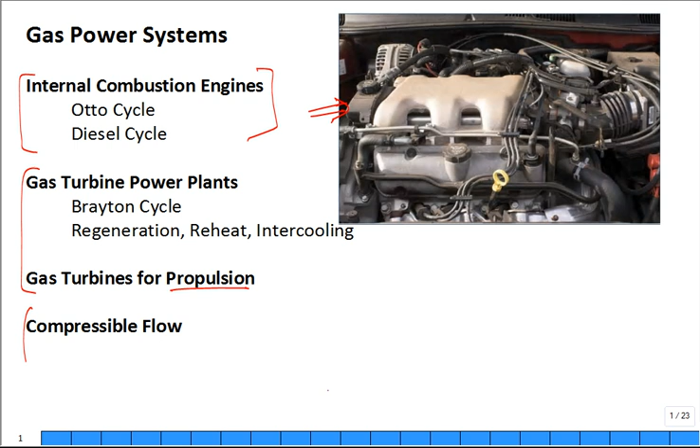How many people have been into engines? Yeah, and they're even getting more complicated because of the sensors and electronics, and you can't hardly do anything now without a code reader.

You should get familiar with the major parts of engines. Let's say this looks like a V engine. It has a spark plug, spark plug, spark plug. It looks like 3 spark plugs on this side, or maybe there's 4, I'm trying to count them. So it may be a V6 engine.

Or you may own a V8, or you may own an inline 4. Some people even probably have a 3-cylinder engine. The newer, really small, high efficiency cars are 3-cylinder engines.

So how many people know how many cylinders are in the engine that they own and drive primarily? Okay, so what is it, a 4? 6? Anybody have more than 8? I doubt it. Anybody have fewer than 4? How many people have a motorcycle? How many in the motorcycle? 2? 2? Who has a motorcycle?

So I encourage you to pop the hood, learn, point at things, understand them, as well as maybe take it apart. But if you pull one of these engines, which some people I'm sure have pulled out of cars, it takes equipment, an engine hoist, and it's very dangerous. You could lose a finger if the thing drops, slips, falls, whatever.

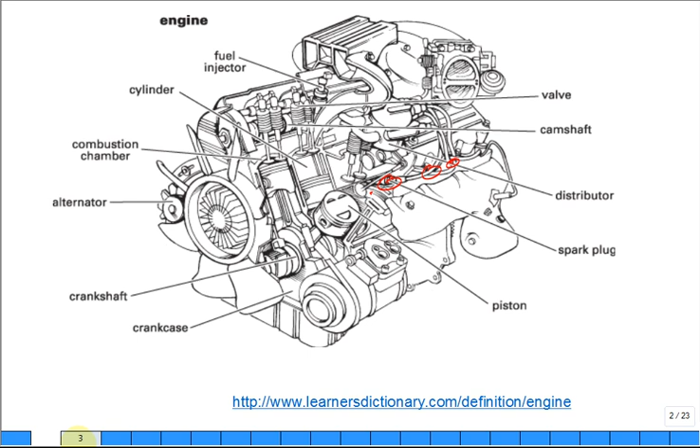Very heavy. But you can also take apart a lawnmower, and you can learn a lot about a lawnmower. It's very simple, but it has all the basic components, right? And what happens that ends the life of a lot of lawnmowers, they have a tree stump or a rock or a boulder, and the blade twirling around in a circle, right? Going like this, with a 12-year-old, 10-year-old, brand new, being trained to cut the lawn, but the dad forgot or somebody forgot to tell him, oh, watch out for that tree stump.

And many a new lawnmower's done. So what'll happen, this will get bent, the crankshaft will get bent, then it's pretty much toast. You can replace it, but it's a pain.

So the crankshaft, from the top up here, is a flywheel. Connected right in here is a connecting rod to a piston. A lot of times the pistons slide forwards and backwards this way. And in the front there'll be a little wire going down to the spark plug. So the piston's going back and forth horizontally, and it's creating the rotary motion of the crankshaft, and that drives the blade connected to that crankshaft.

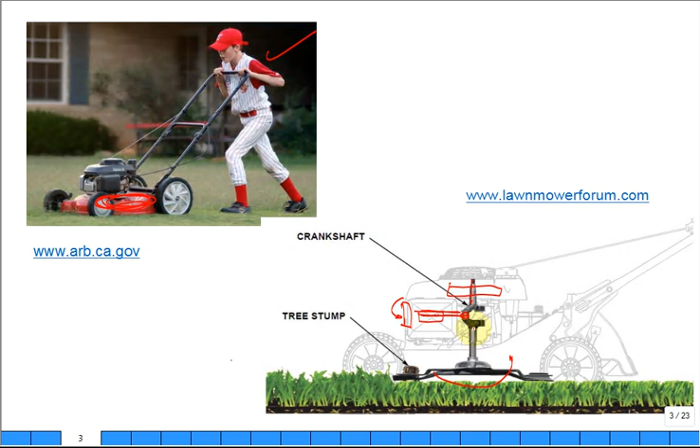Okay, you can find them cheap. Find them when people bust them and then throw them away. Find them old, you can find them on trash piles. So in our neighborhood, down the street once a year, spring or fall, they'd have a big item pickup. It's a great time to learn. Free education waiting for you.

Just go out and get that lawnmower off of your neighbor's trash pile quickly. Why? Because the metal recycle guys are running the neighborhood in circles like vultures, and it's money for them, and they will pull all the metal off because they can recycle it. And there's a lot of aluminum, especially in lawnmowers. So you have to beat them.

And then when you're done taking it apart and learning, put it right out to the curb. It won't last an hour, and it'll be gone. And the person that puts it in the back of their pickup truck will thank you because it's all broken down and easy, okay? So this is one of these where you could take it apart and don't even try to put it back together. So just look for big item pickup, but you have to be quick.

Okay, you'll probably need this, you may have to break something. A big hammer, be careful. And an electric impact will really help, unless it's relatively new, then you can just get them off. Otherwise, you can get a friend and do it together, because it's hard to take those things apart.

You can diagnose and see, oh, that's why they're getting rid of this here lawnmower. See, they hit something so bad it bent that blade. A lot of times when you take it off, this is the top of that crankshaft right here.

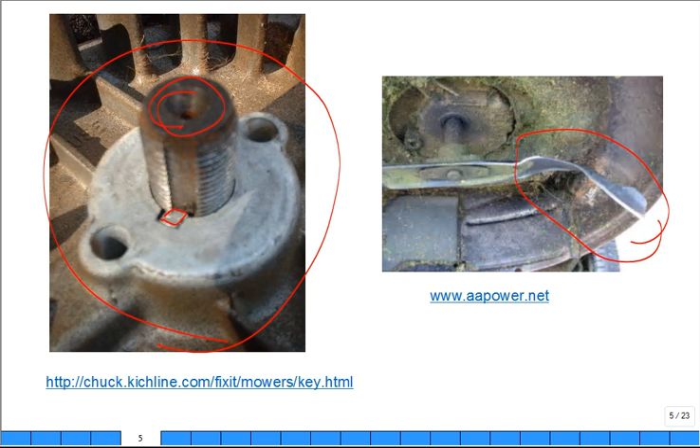So you could learn a whole bunch about fixing lawnmowers and repairing them and how they work. But what I wanted to do is show you some stuff, because out on the internet it's incredible what's available for visualization. Years ago you couldn't watch this - I never had a video. I was through my education and everything, PhD, before the internet was invented.

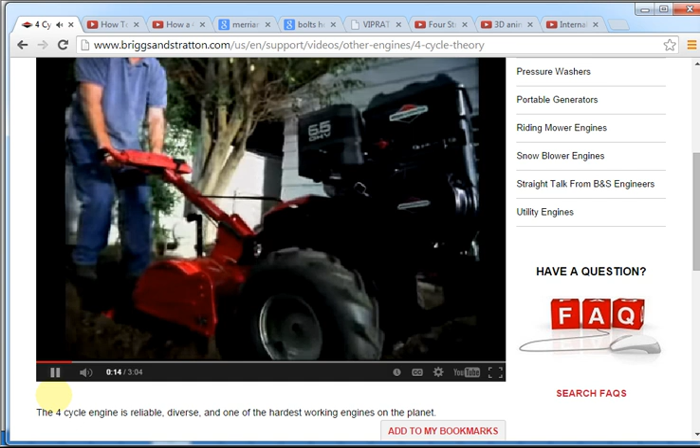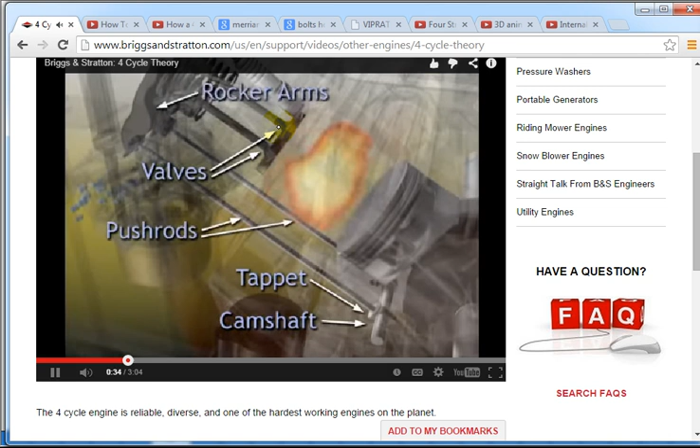Hard to imagine, right? But you can watch this, put out by Briggs & Stratton about engines and the utility and where they go. There's plenty of them. One of the things it does later on is describe the basics of what's happening - maybe I should have let it run without my playing with it - talking about air valves opening and closing. Typically on a lawnmower it's running horizontal, right?

That piston sliding back and forth horizontal, and the rocker arms - sometimes they have them with a little push rod right here. Whoops, I just messed that up, didn't I? I can't draw on that. Here's 4 essential elements: air, fuel, compression, and spark.

A lot of times it's like, check those. Do you have good airflow? Do you have fuel? If you don't have fuel, you can pull all you want, it's not going to run, right? A lot of times the carburetor is all balled up and gummed up after sitting for a long winter season, and you just drop the bowl, clean it, and put it back together, and it works.

So they're going through the intake stroke, ingesting air-fuel mixture. The piston's going down, and then at the bottom dead center, the intake valve will not be open anymore, but it will transition to be closed. Up here is a mechanism with this push rod, little rocker, and down below is a camshaft controlling the valves.

Then you go through the compression stroke. At the top you get a spark plug - did you see they showed a little spark coming up to the spark plug? Kaboom. You have combustion. It's spanking hot, high pressure, high temperature, and it's the pressure that pushes the piston down. As it's pushing, it's expanding. That's your one stroke where you get work out, or energy into the system, into the power.

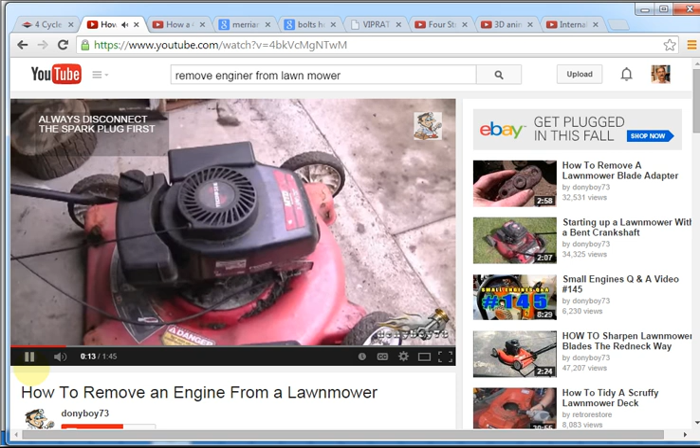Also, if you do get something off the trash pile, there's videos that just show you how to remove the engine. So I just thought I'd quickly show the engine sitting here - that piston, that's a spark plug, and the piston's running back and forth here. All right, he's saying disconnect some cables, and he's going to pull this engine off.

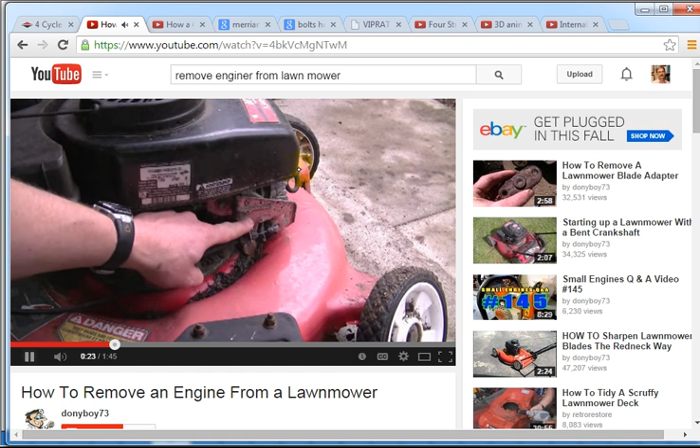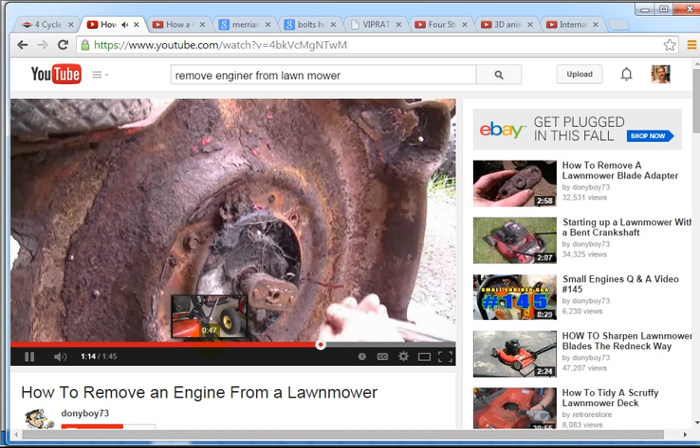All right, he has air impact—much better, taking old bolts off. And there comes the blade. Typically there's 3 bolts, or sometimes 4, those are metal steel bolts that go into aluminum. A lot of times you just shear them; they won't come off if it's old. This guy got them off, and then it just drops.

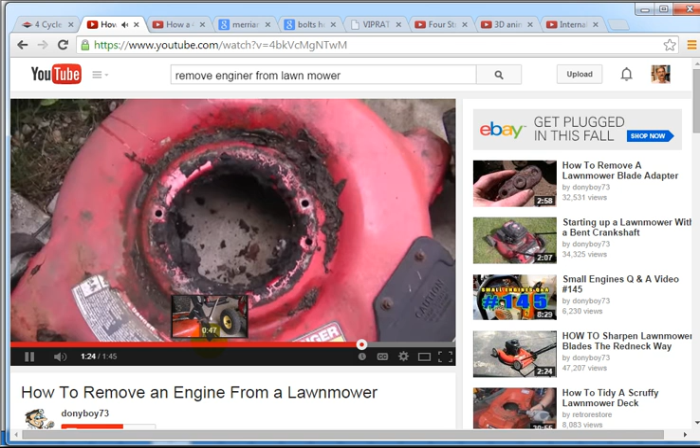So there you go, not much to it. You can get the lawnmower information about lawnmower engines and stuff off the internet. Let me show you this.

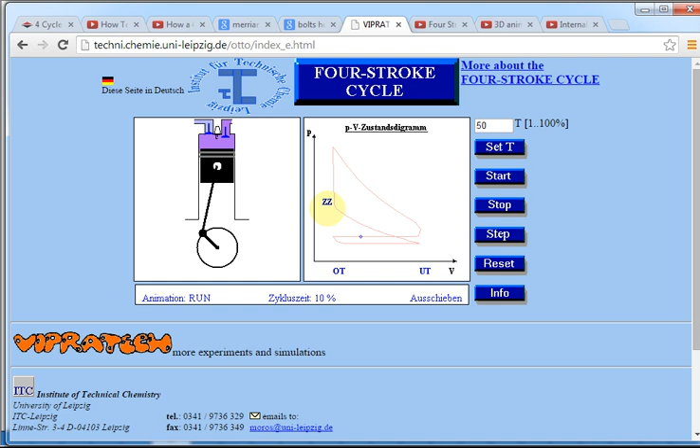Okay? I'm kind of getting out of whack here, but then it gets to bottom dead center, and it starts the compression stroke. And when it gets to ZZ, spark. What happens? Very prompt combustion. So the pressure skyrockets when it's at top dead center. Then you expand in the power stroke. See the big pressure drop right in this vicinity when it's at bottom dead center? That's due to blowdown. And then you still push, so slightly over atmospheric pressure as you're pushing it out.

And you have to push it through the exhaust valve, through the exhaust manifold, through the catalytic converter, through the muffler, through the tailpipe. Finally, atmospheric pressure. And then it drops. So this is a great illustration. Okay. Let's take a look at another illustration. Stop. Some of these are just great. So this is an inline 4.

Now if you can get one cylinder and one piston understood, then you just have 4 of them. And they have it color-coded so you can see the power is the orange when you have a power stroke, the combustion at the top and then pushing down for the power stroke on each of them. You have the crankshaft and how that rotates, translating that reciprocating motion of the piston in the cylinder to rotational motion in the crankshaft. These are connecting rods connected to the piston that slides, and they just show you how that mechanism works.

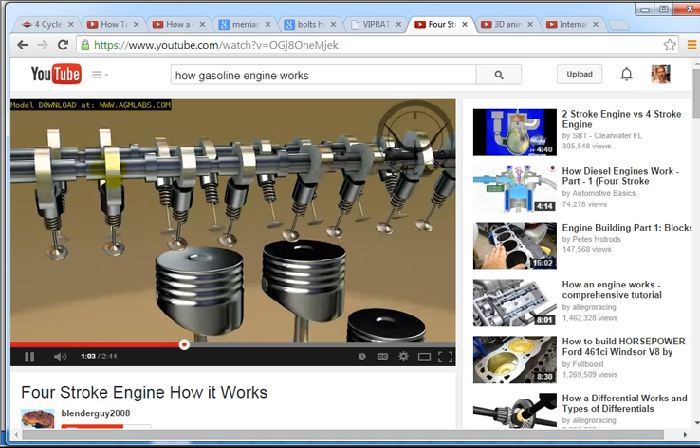Then they have a belt, the timing belt, that goes up and runs 2 overhead cams. So you'll see that overhead cam, 2 overhead cams. And you'll have for each piston 2 exhaust valves and 2 intake valves plus 1 spark plug. I think some have 3 and 2. Anybody know what they have in their engine? They'll be like, oh, I have a 24 valve engine, right? Well, how many cylinders do you have? And so if you had a 6 cylinder, you had 24 valves, 4 valves per cylinder, 2 intake, 2 exhaust.

This really clarifies, I think, if you could see it and see how it moves, and you could speed it up and slow it down. So they've done a great job on these illustrations. I'll show you just another one. Come here. This is a traditional, like Chevrolet big V8. V, why V? The 4 cylinders and another 4-cylinder bank in a V shape.

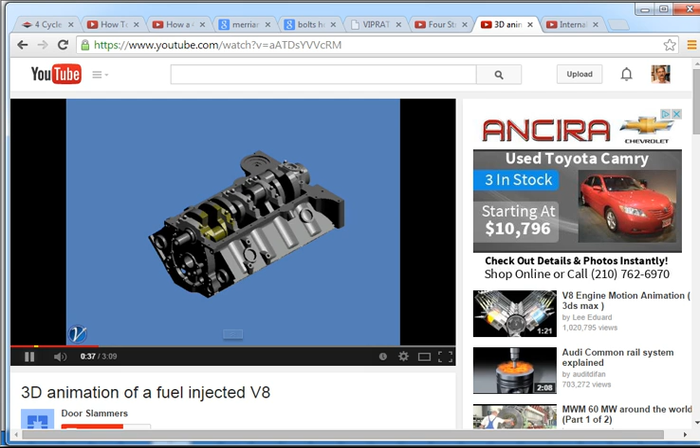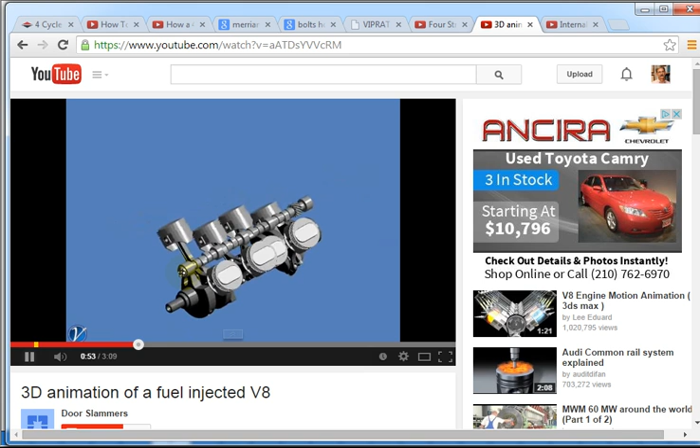Okay? And this is the block and the crankshaft and the mains to bolt it down. They're just showing you how it's put together. This is upside down, not right side up. They're going to flip it around in a second. And okay, there's that crankshaft. Keep going. There's the connecting rods. And you'll see how they have the connecting rods. 1, 2, 3, 4, 5, 6, 7, 8 connecting rods. Those are the pistons, wrist pin. And you have only one camshaft, an older V8, sitting kind of in the valley.

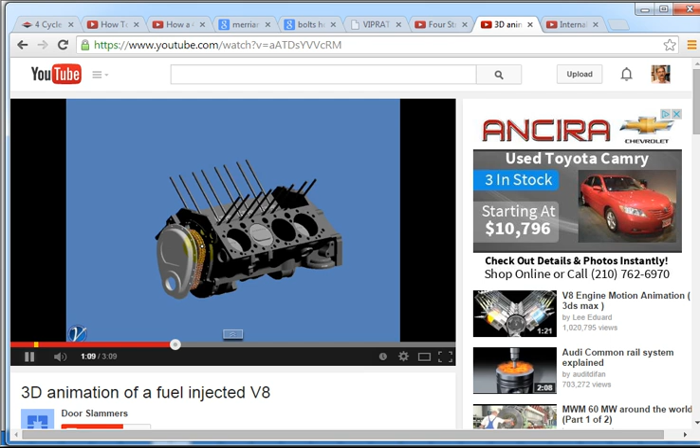And then they have lifters sitting on them, and then little push rods, long, thin push rods that come up to the top where the head is. There's a timing chain, so it connects the timing for the crankshaft and that camshaft. And typically the camshaft makes 1 rev for 2 revs of the crankshaft.

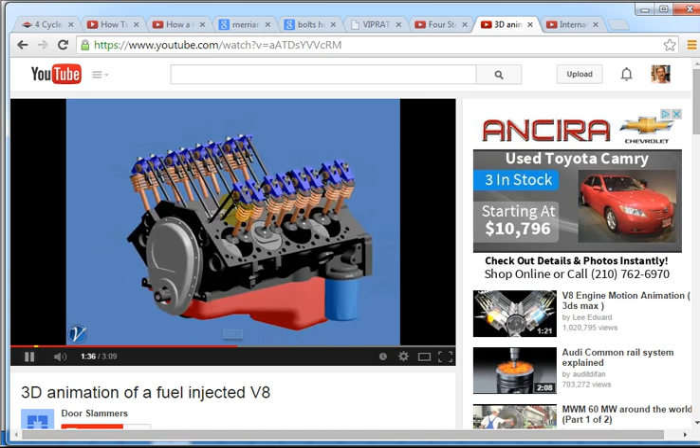Oil filter, oil pan, and then they're going to put the heads. There's the valves with the little rocker mechanism. And the spring makes the valve seat quickly. You have to push to open it, but then it wants to return with that spring. It's a poppet valve. The very old traditional head. Oh, look at that, advertising Chevrolet. So like a 350.

There's your fuel injectors, a fuel rail, the intake manifold right in here, intake plenum, throttle body. So it's nice to know. And so as you push down on the gas, it opens up those butterfly valves. Yeah, that's it. How could I not think? And so there you go.

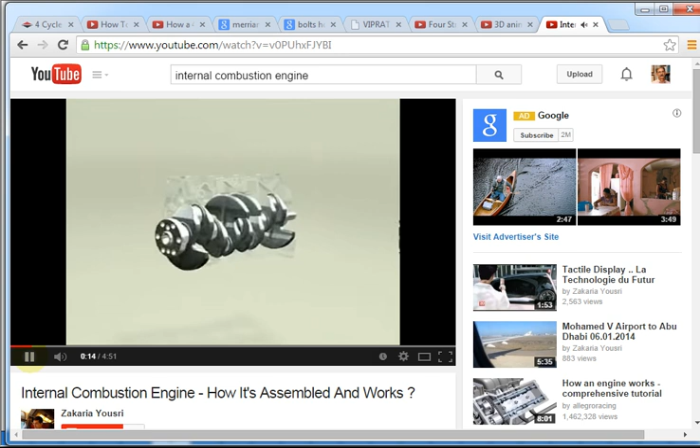One thing, I want to go to another one too. This is a block. You can see this is all one machined part, right? And mechanical engineers really are our domain. But I wanted to stop right there. Whoops, back up. Right here, what is coming down? Right, these little caps, and then the connecting rod. You see that? This is the connecting rod to the piston.

What are these half moons on the bottom and top? Bearings. You never heard of spinning a bearing? You take that top half or bottom half, and it's not sitting on the top or bottom half anymore. It gets a lot of slop in there from wear, and then one slips and comes around. So you've got one place where there's no bearing and one where it's doubled up. And that engine goes kaboomy pretty fast because there's a lot of heat generated right there, scoring of the crank. And then typically the connecting rod bursts and is thrown out the block.

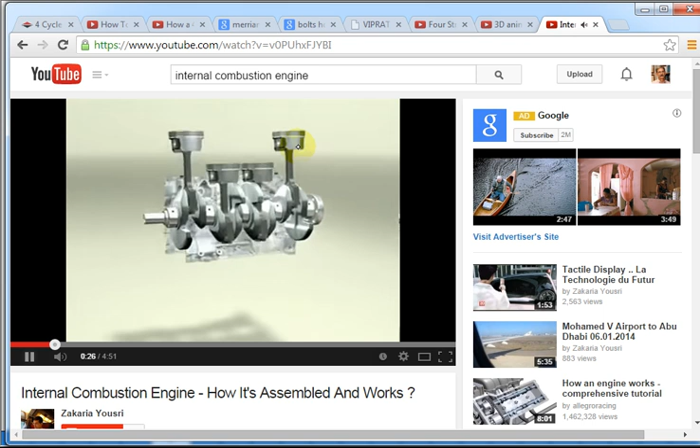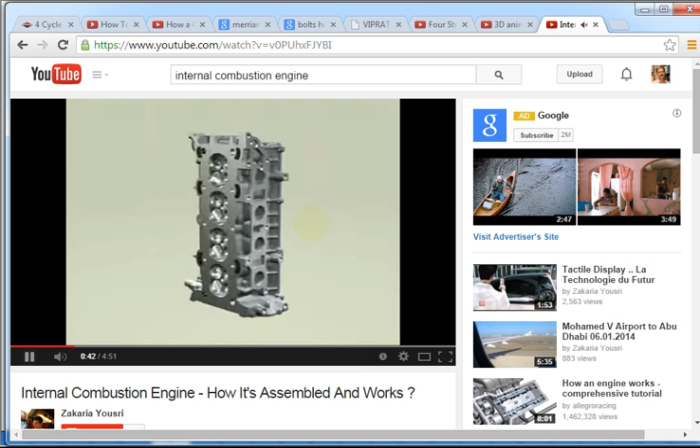This is wrist pins and then the piston so it can wobble. That's the wrist pin and piston. And they put them together inside, and then the whole mechanism, the bolt. That's the flywheel, right? In the back, where the starter runs on those gears. There's the head. And so it can be a lot more complex than a little Briggs & Stratton 3.5 horsepower lawnmower engine. But you can learn a lot from that Briggs & Stratton engine. It's cheap. You can't hurt yourself on one of these.

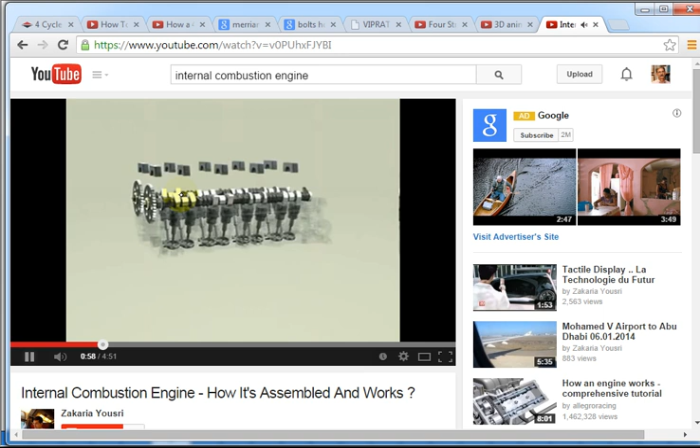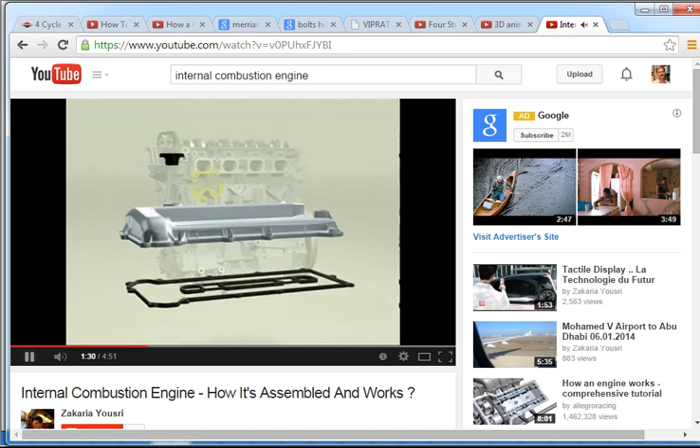Well, there's more timing, 2 overhead cams on this one, more modern. The head gasket went on there, and then they put down and bolt the head to the engine. Notice the difference in the diameter of this sprocket on the crank that the timing chain is going to run on and the diameter up here. And so this gives you the right ratio of turns: 2 rotations for the crank, 1 rotation for the camshaft, because it takes 2 crank rotations for a complete cycle. Okay, so there you go. Hopefully that was interesting. Let's go ahead and stop it and jump back to here.

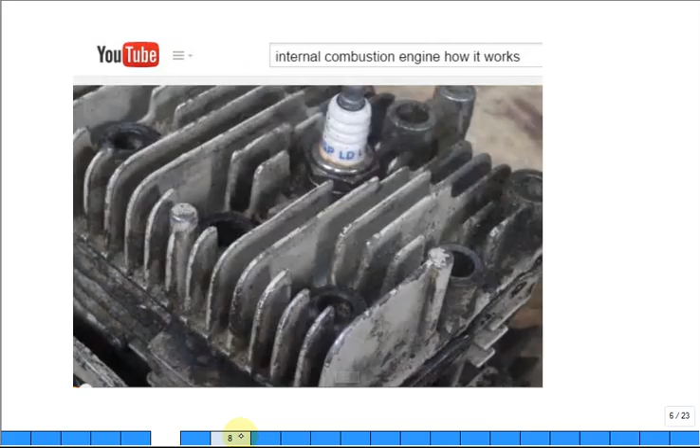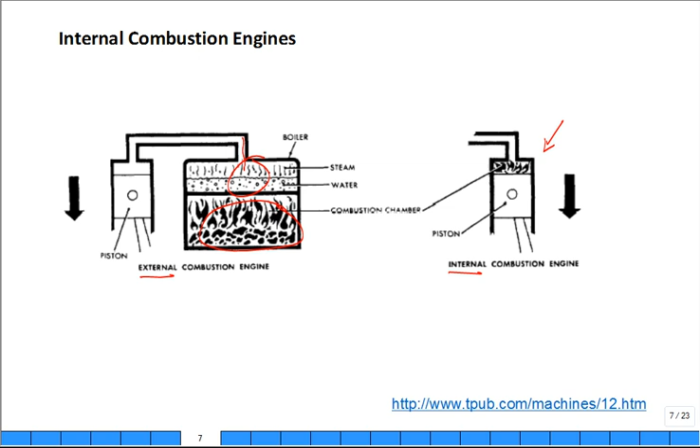So there's a historic distinction between an external combustion engine and an internal combustion engine. All these gasoline engines, diesel engines are all internal combustion. It used to be you burned the coal, boiled the water. That isn't where the expansion happened, so it was piped over, and that's where you had the expansion in the engine. And then the beauty of the crankshaft, how it converts the reciprocating motion of the piston in the cylinder, back and forth, up and down, to rotary motion, rotational motion.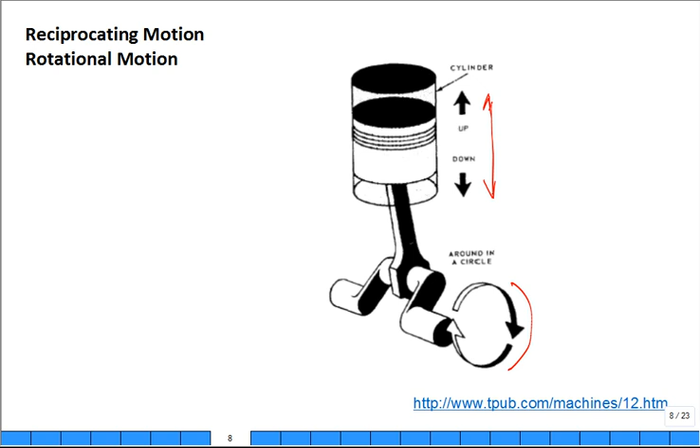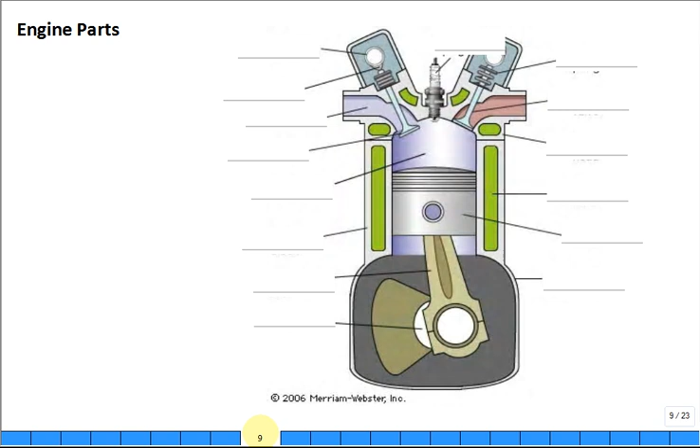One of the things I challenge students to do is to look at an illustration and then name the parts. Put it away, test yourself. Can you recall all these parts? It's a good way to learn. I'm not going to do that now, but I encourage you to do that. Take a look at this illustration.

Oh yeah, that was that camshaft. And it has a lobe on it, and then it pushes down on the spring and the poppet valve to push it off the seat to open up a passageway for the intake as well as the exhaust. And then you had the spark plug, blah, blah, blah. You can go through the whole thing, okay?

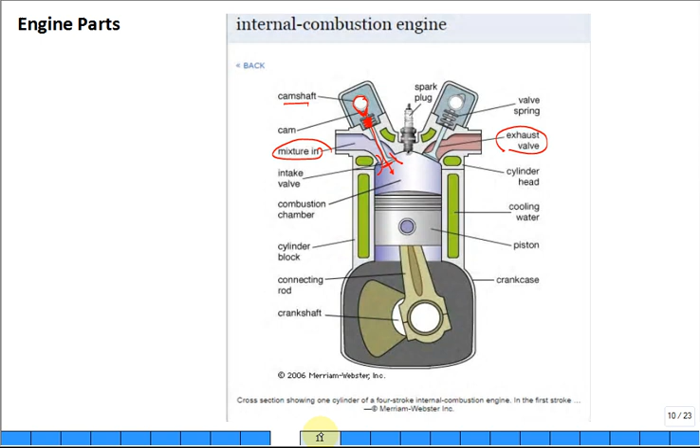It used to be you didn't get to see the visualization like I just showed you. You had to take it from a picture like this or a figure. So we had how many strokes? A 4-stroke cycle. You have the intake stroke, compression, power, exhaust.

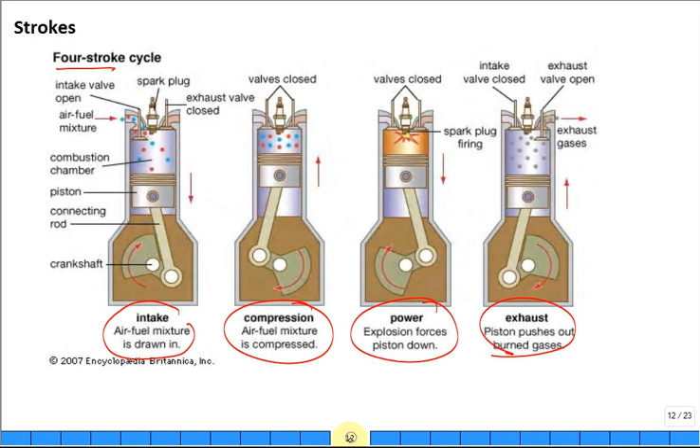And then I showed you this illustration. Here's that website to find that illustration, since it's not on YouTube. So let's do a review of what we covered in Thermo 1.

So, well, what is the air standard analysis? Well, you assume it's a fixed amount of air trapped in a piston cylinder apparatus. The air never is converted into combustion products. It's not an air-fuel mix. It's just pure air. It always behaves as an ideal gas. Combustion process is very complex. We just replace it by heat transfer from an external source when the piston's at top dead center.

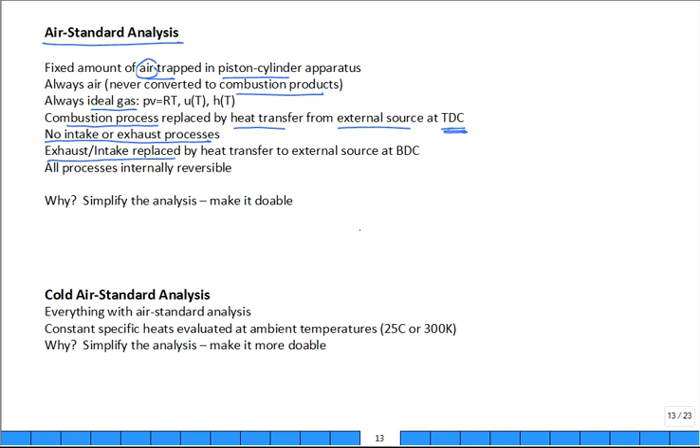Little acronym, top dead center. When the piston's at top dead center. Okay? There's no intake or exhaust process that we explicitly model. We just say we're going to replace that or model it by having a heat transfer from an external source or to an external source when the piston's at bottom dead center. So that's how we get away with simplifying it enough so we can make an analysis. All the processes are assumed to be reversible.

Why do we make this air standard analysis? Because it makes the calculations doable. You also see the distinction cold air standard analysis. Well, it's everything that's above, but also constant specific heats that are evaluated at ambient temperature, either 25 or 300 Kelvin. Why the cold air? It's even more doable. You can do the calculations and see the relationships in the analysis.

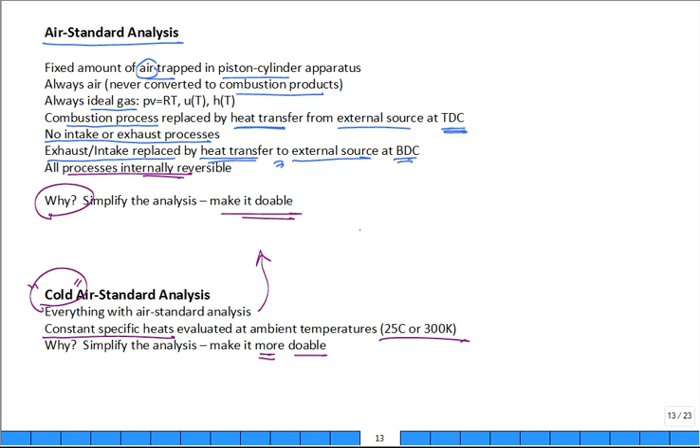Let's do a quick review of the Otto cycle. Otto cycle has 4 processes. So from state 1 to state 2, the process of adiabatic compression. Then from 2 to 3, constant volume heat addition. 3 to 4, adiabatic expansion. Then 4 to 1, constant volume heat rejection.

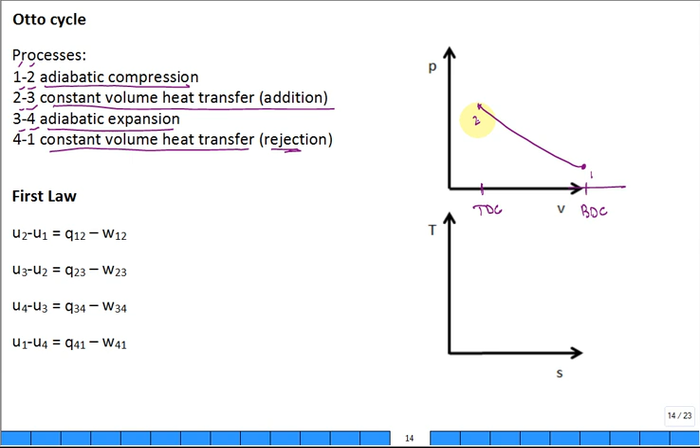So on a PV diagram, start with a large volume, bottom dead center, and put top dead center somewhere like that. Start with low pressure, compress it, the pressure went up. That's from state 1 to state 2. Constant volume heat addition, the pressure is going to go up even more. Then 3 to 4, that's going to be expansion. And then 4 to 1, constant volume heat rejection. So this is Q in. This sometimes I put Q out. This is adiabatic, no heat transfer between process 1 to 2 and process 3 to 4. So that's what the cycle looks like on a PV diagram.

What's it look like on a temperature entropy diagram? Start relatively low temperature, state 1. You go through reversible adiabatic compression, isentropic process. The temperature is going to go up. And then constant volume heat addition. The temperature is really going to go up because you're bringing in heat. Your entropy is going up as the temperature goes up. So it goes out like this to state 3.

And then reversible expansion from 3 to 4. And 4 is still hot, still high pressure. You have heat rejection. So this is the Q in. This is the Q out. These were adiabatic. So what does the area inside the cycle on a PV diagram represent? The net work of the cycle. So that represents W net of the cycle.